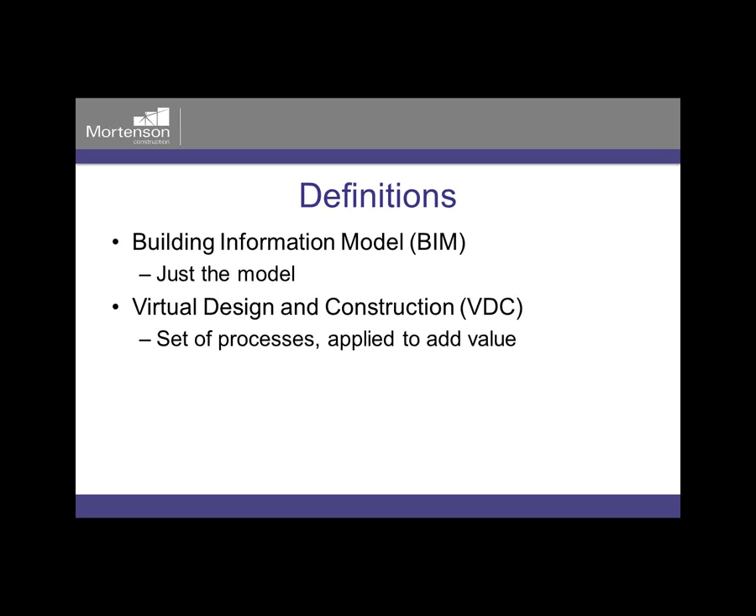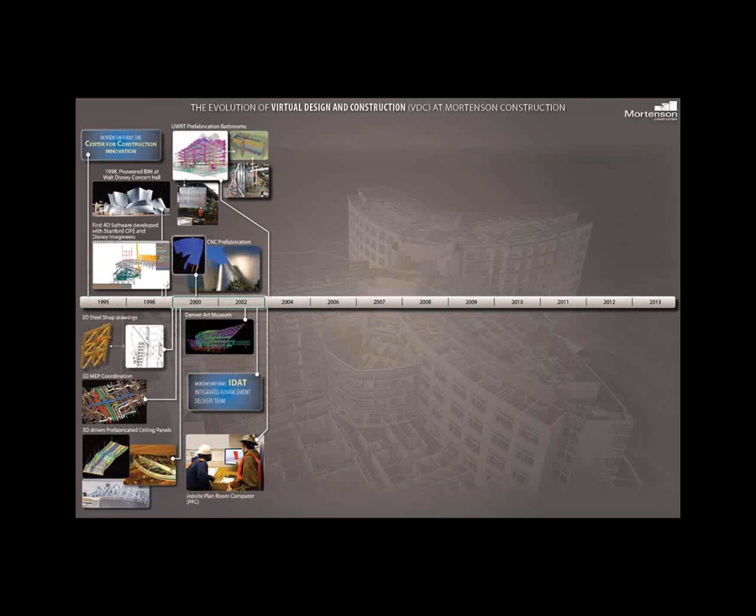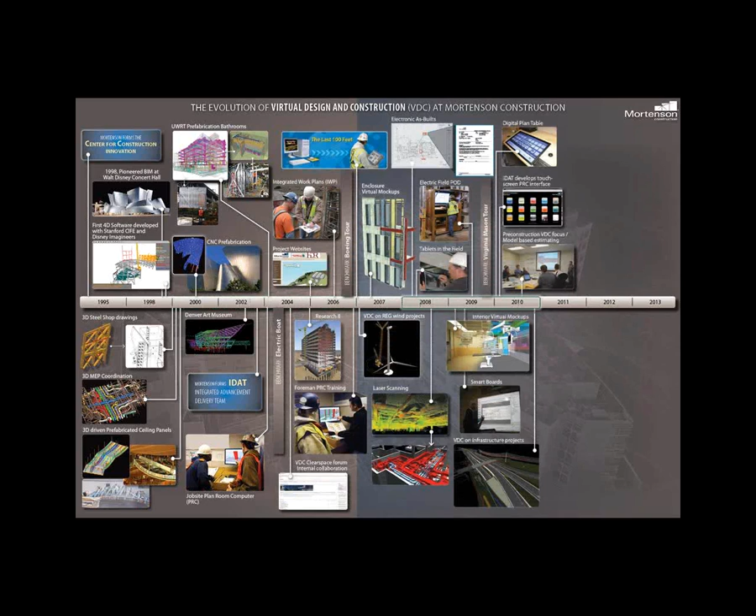Go ahead Chris. It's Chris here, just a brief intro. You'll see as the slide builds a timeline of Mortenson's processes related to virtual design and construction over the years. Our philosophy and approach is that the VDC processes utilize BIMs, building information models, but the value comes from the process, not necessarily the models themselves. The models are just a means to the end.

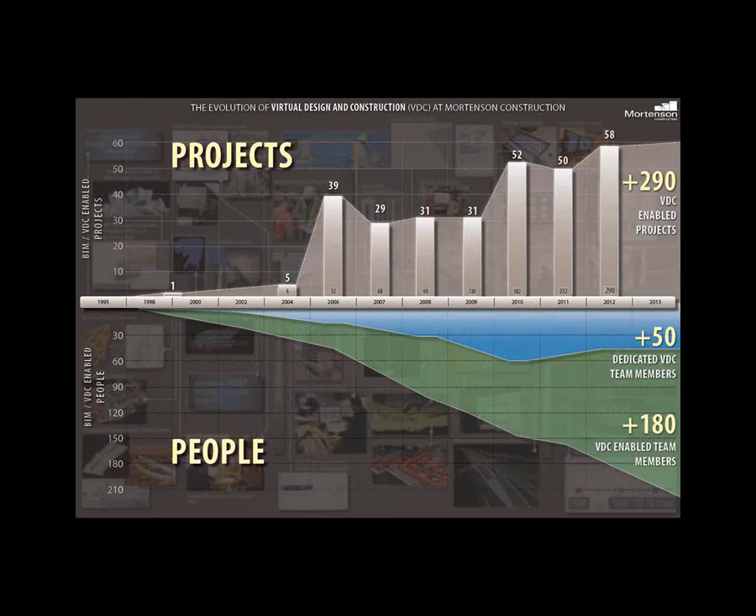Here's a little background on some experience over time where we're trying to grow both our project's utilization of virtual design and construction, and at the same time build the expertise and embed that expertise within our folks' skill sets.

Here's a little more history, if you will, or some reference or guideposts as far as Mortenson's progression through virtual design and construction.

The area we want to spend the most of our time on today is really acknowledging the difference between 'using BIM' on a project and differentiating those various uses that apply value through virtual design and construction. This reference graphic is from the buildingSMART Alliance, part of a project that Mortenson was a contributor on, among others—a consortium of folks representing architecture, engineering, contractor, and owner-operator areas of our industry.

And this is really the framework that we use to create a frame of reference for the various uses.

Let me interrupt you real quick. Typically you can see the plan, design, construction, operate silos, if you will, throughout the duration of an entire project. Historically, general contractors have been comfortable in our silo there in the third column. This is kind of where we operate and where we feel comfortable. We take elements from design, we build it, and we typically hand it over with the keys to the customer, and we move on. That was historically how we were doing it.

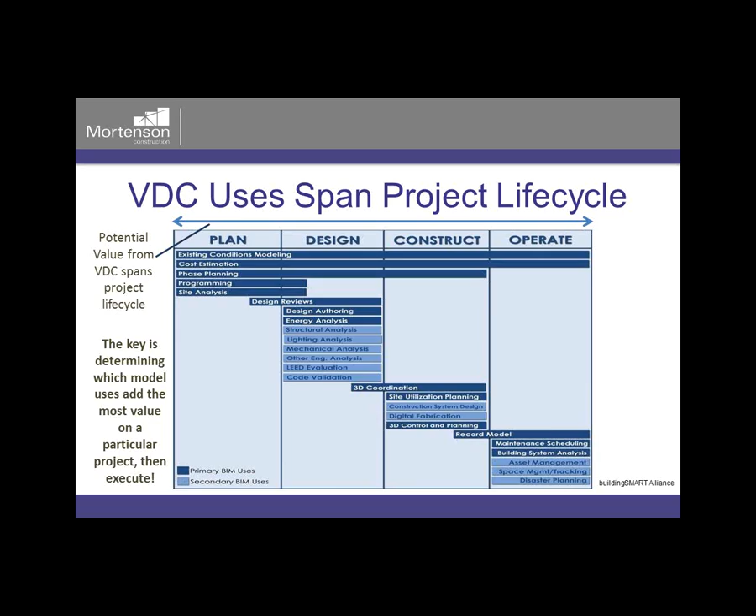The great thing about this framework is that it provides some consistent nomenclature, beyond just doing BIM. That was really a transition, a paradigm shift within the industry, as firms in the AEC industry and owners, the paying customers, get more versed in expectations that we're no longer just, quote, doing BIM.

An important piece of this is how all the parties contribute or inhibit VDC use to add value on the project. The largest way we believe to improve this is to acknowledge potential downstream uses for BIMs, for the building information models, early in the project.

So Mortenson's intent is to support the design and owner team to best deliver the value, not necessarily to be interpreted as us trying to define what the owner's needs ought to be. We're here to participate, contribute, and make sure those are enabled. Likewise with the design team, it's not our intent to say this is how the designer ought to be using it. The point is there's a dialogue and the framework across the whole life cycle.

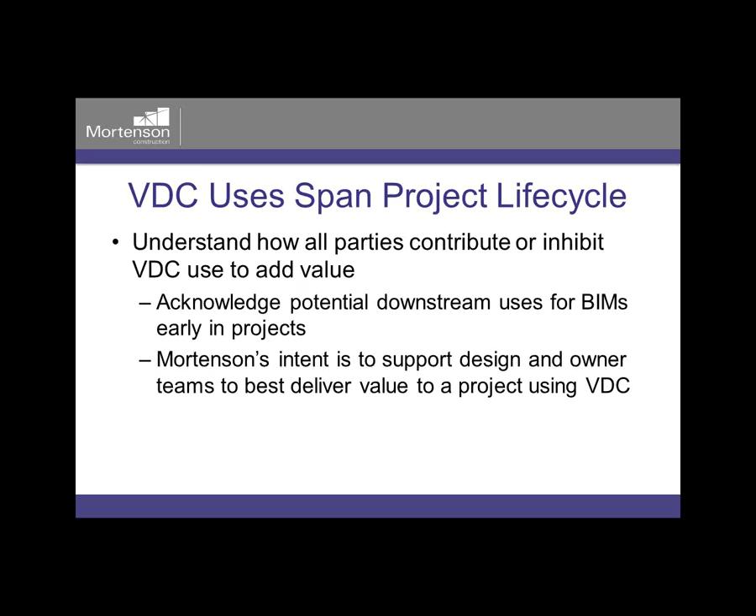Okay, so when you're talking about quality in construction, and specifically how Mortenson's organized, why VDC to quality?

So essentially what we're trying to do with quality is control our cost, mitigate our risk. It's all about customer satisfaction and repeat business. So let me go on with the next slide here.

There we go. So Mortenson's business model, we typically shy away from hard bid work these days. We are more of a negotiated contractor. Our business model is centered around not necessarily achieving work by giving the lowest bid. Ours is targeting specific customers, specific businesses, and specific partners to go on more of a negotiated front.

To achieve our desired outcome, our target value, most reasonable price, and repeat business, we have to really control how we're delivering our work, and that's where quality steps in. Because thinking in terms of the customer and the end in mind when we're planning a project, we're trying to give the customer the best product for the cheapest price and leave them with the best lasting impressions so we can turn around and have either referrals or repeat business.

Just a couple of stats here. When we do our customer surveys, when we are rated as a far superior contractor, when those particular customers go out and venture out to do additional work, we historically have a 60% chance of getting that work on a non-compete basis when our customer service numbers are high. So that's our strategy, and that's how we are approaching it.

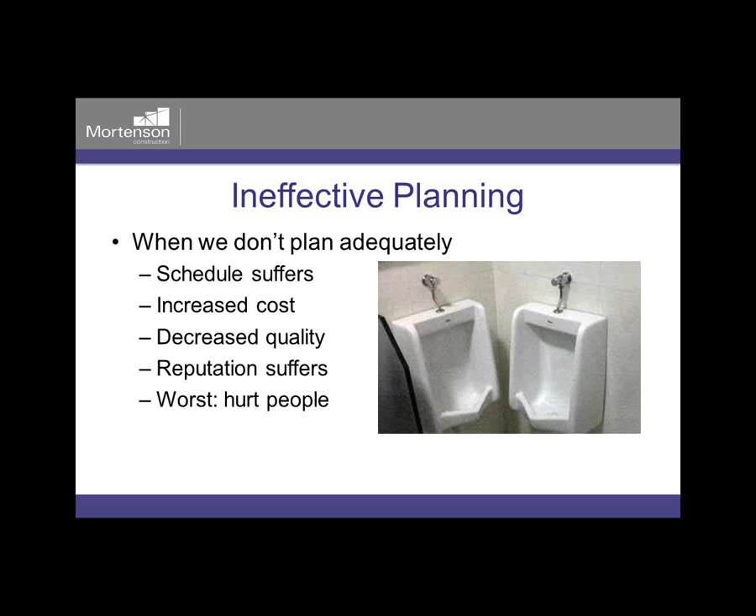Essentially, our strategy is developed around integrated planning, and integrated meaning it's not just us. We're involving all of our partners, from subcontractors and vendors to design partners, even customers. When we don't do that, the schedule can suffer. We can have increased costs, decreased quality, and damaged reputation. And the worst case scenario is when we do ineffective planning, somebody gets hurt in the process, which we absolutely do not want.

You can see elements of improved planning, increasing predictability. We want to know what's going to happen, when, internally and externally — communication to the outside world, to customers, especially when we're involving adjacent spaces or disruption avoidance with occupied spaces. We need to know what's going on there and manage those expectations. As you'll see in the following slides, some elements of how we can utilize VDC and leverage it to make that communication clear.

Again, beginning with the end in mind: establish a plan and control the perceptions. Value added — we're not going to do something just for the sake of doing it. We're going to think in terms of the customer, what their desires are at the end, and utilize that.

As part of the, how do we do that? This is one of the most important parts. It can be natural from our own perspectives. What we'll see frequently is so many things to pursue on a project, and so many things are important, and there's a natural tendency to just dive in and start creating content and moving — the feeling of let's just start putting work into place. Really the important strategy here is to make sure we're pairing up those opportunities, needs, and risks for a particular project, and align a use to make sure we realize the opportunities on the project's behalf, or mitigate risks and uncertainty. These model uses really achieve that — that's really the key objective.

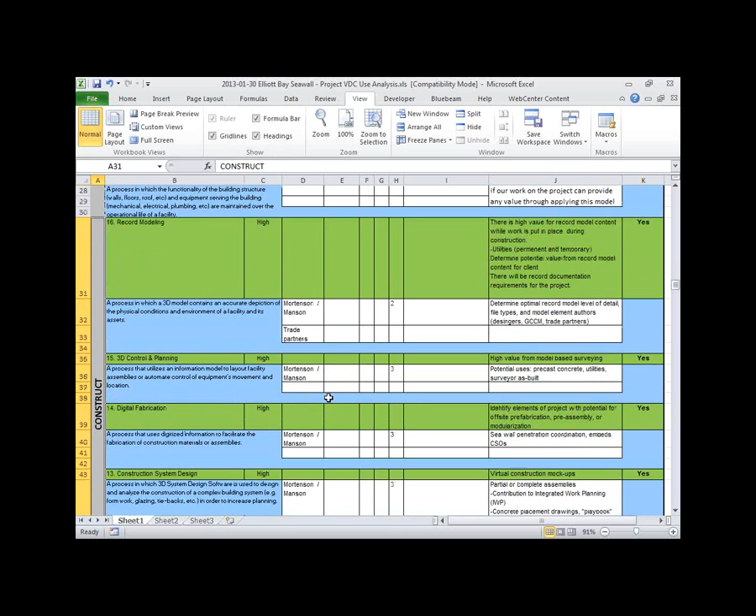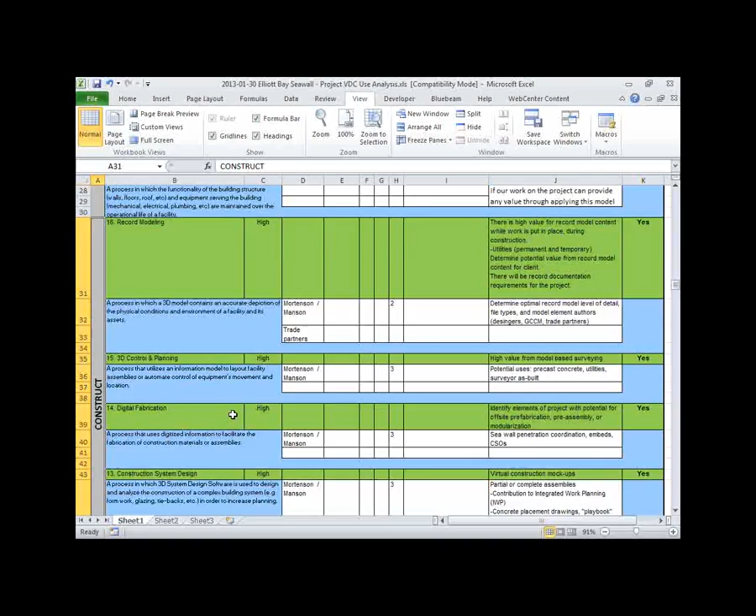Here's an example of one of the buildingSMART Alliance templates. If folks on the call aren't familiar with it, I definitely encourage it — this is open source information from that consortium we were talking about, which really gives the best shot at leveraging common nomenclature for various uses and aligning a particular project's needs with those uses. All the way from the operate stage, to construct, design, and plan — really beginning with the end in mind — what would the client, the most downstream customer, achieve value from?

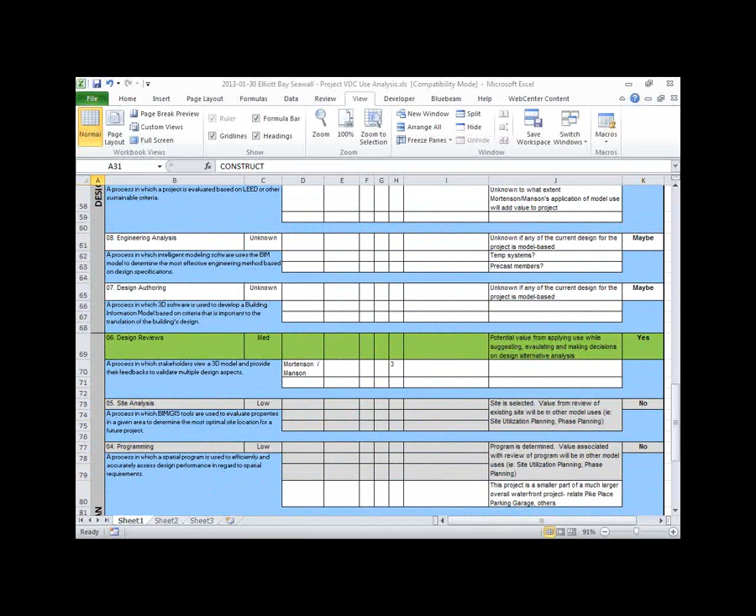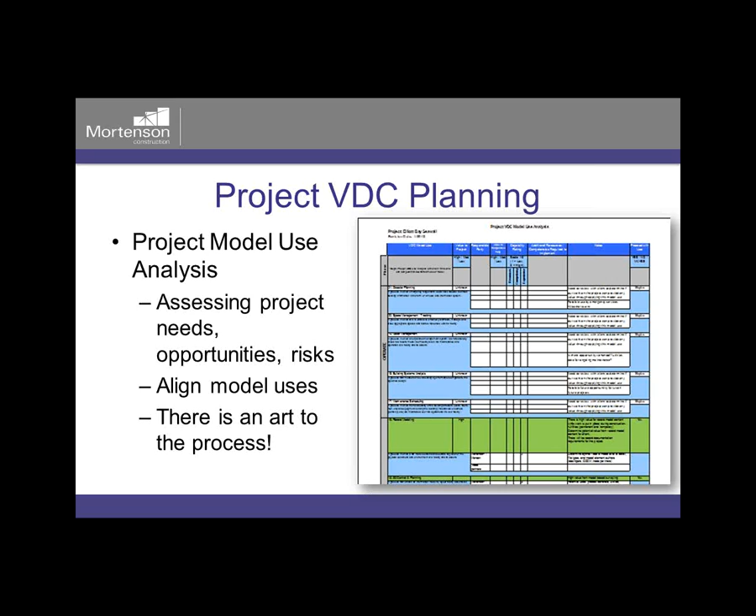This is a really great tool, not just for us, but also for specification writers when we're thinking about interfacing with customers and trying to interpret what they want in the end, and outlining that so we can set expectations early in the design phase and get those written into the specifications. The earlier the better, as we'll find out here in a minute.

The next step after establishing these potential uses is creating a plan that the team can utilize to agree on and go execute. So there's definitely an element of model management between the various firms — designers, trade partners, the GC, and CM.

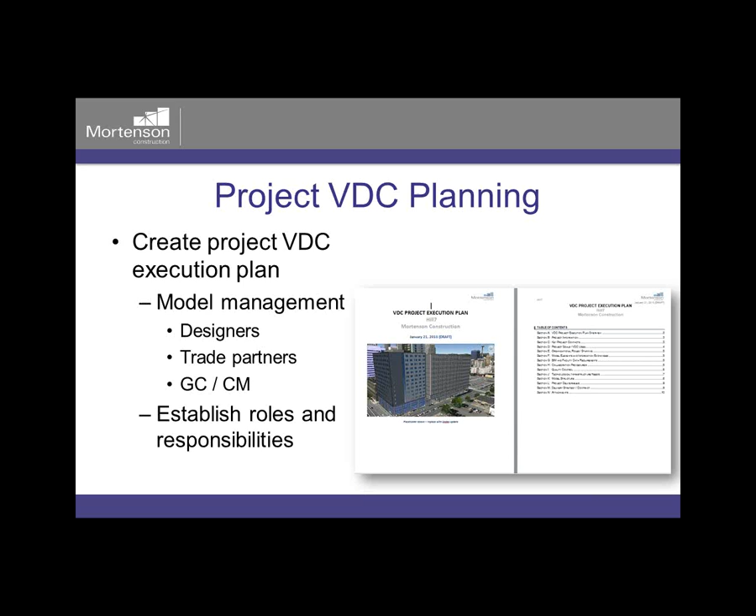The key thing happening here is we're establishing roles and responsibilities, schedules, milestones, and all the intricacies of model handoff and right of reliance. Those things ought to be determined and documented within a plan. It needs to be clear on who's going to make the model, how it's handed off, who's managing the subcontractors with their input, how we're doing clash detection, how that's delivered back to the architects, who's as-builting, and who's delivering the final deliverable to the customer. This document makes that crystal clear for all parties from day one, so we're not having these discussions as we go.

Okay, integrated planning. What you're looking at here is a phase plan — a structural phase plan for a project we did in Billings. This is typically how, if you've heard the term 'the last 100 feet,' we take information from the model and deliver it to the foreman and craft on site. We translate this down into a PDF, and it was actually an active PDF with a movie showing our construction sequence, which was critical because we had some very critical leave-out elements to get mechanical equipment into the building.

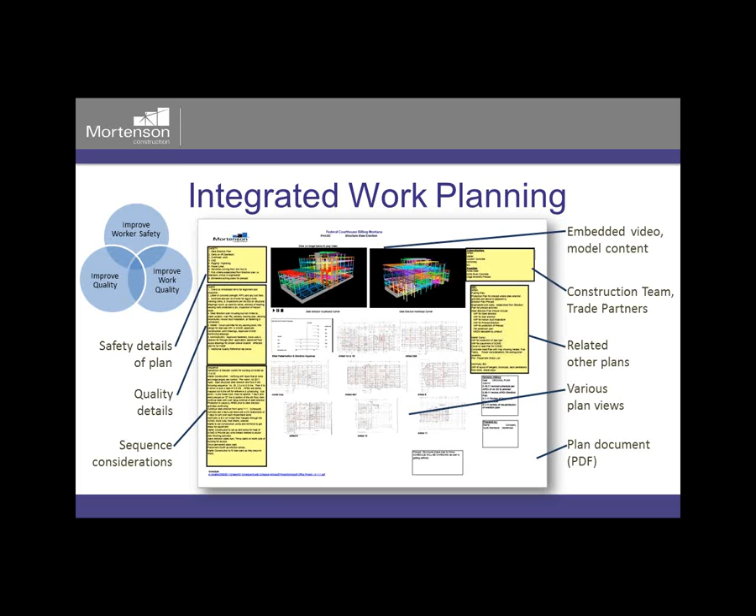We can also print this out in an 11 by 17 format that the foreman can keep in the gang box to understand what's going on and communicate that to the craft daily. We cover safety, quality, and sequence, and this information is extracted right out of the model. I think we used Synchro along with the structural model to show the sequence of how this is going up, and we embed this into a PDF so we can email it to everyone and they can play it at their leisure to see what was going on. Other elements typically included are the players, their phone numbers, and other related plans.

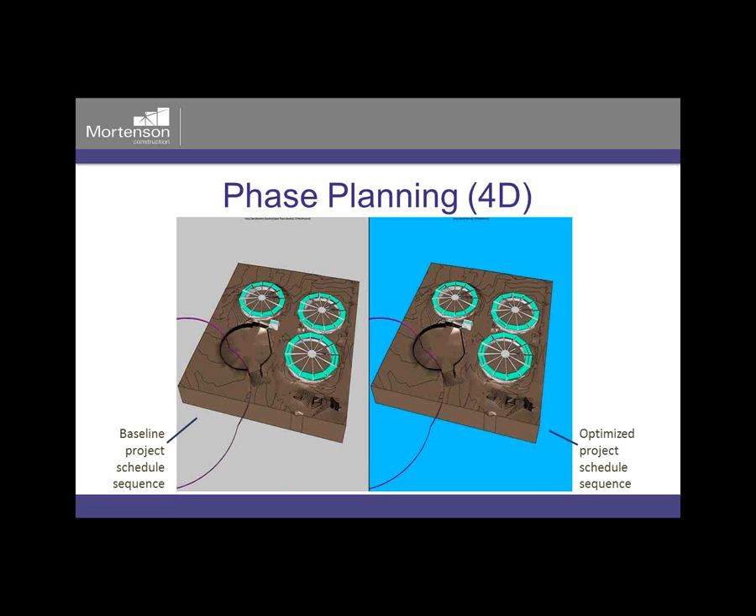We've also begun incorporating 4D planning, which was extremely critical on this particular project. You're looking at three existing clarifiers and a new clarifier for a wastewater treatment plant we're installing in Bellingham, Washington. The purple circle is a 100-foot radius from a heron's nest. In order for this project to permit, we could not perform any construction activities within that 100-foot radius between January and April, the heron mating season.

So we had to prove how we were going to get this done, maintain our schedule for the customer's needs, and permit it through the Department of Ecology to show we wouldn't disturb that radius. For those who know about clarifier mechanisms, typically you construct them from the center and work your way out. The model on the left shows how the clarifier was originally planned in the CPM schedule. The model on the right shows how we had to adjust it to build the elements within that radius first and work our way back. There was a lot of sequencing and replanning to ensure we stayed out of that 100-foot radius.

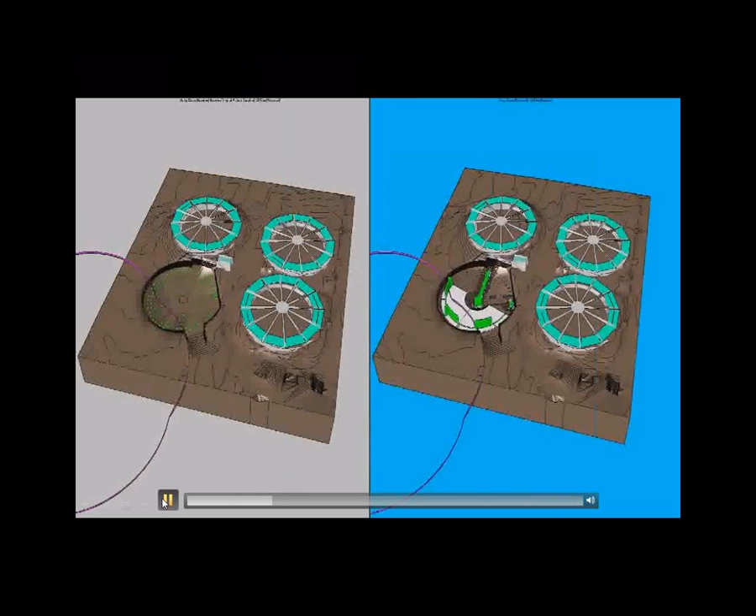So this was a communication tool. We used BIM to leverage this with our project teams, subcontractor partners, the owners, and the city to show them we'd get this done in the time frame allotted — that we wouldn't be within that 100-foot radius come January. Otherwise, we would have never gotten the permit.

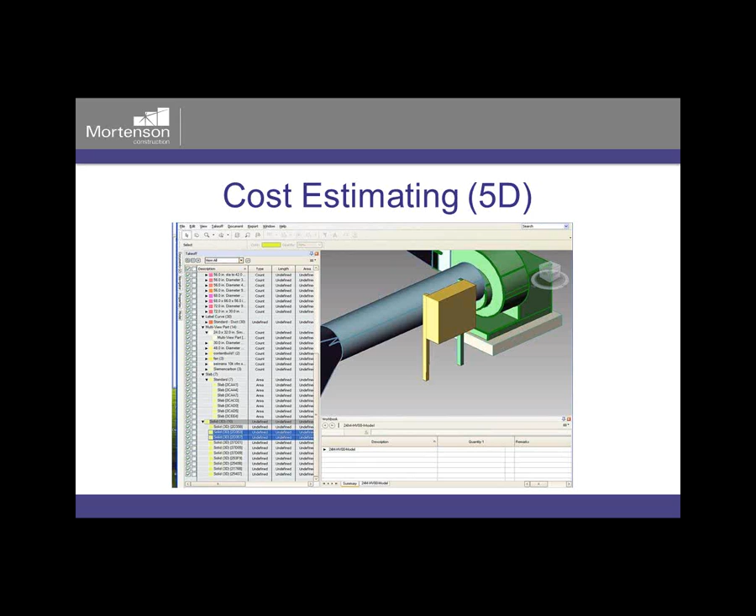Another use and application of the intelligence and information contained within a BIM is its basis for cost estimating, also known as 5D. The common nomenclature, of course, is 3D for the spatial attributes of a model element, the fourth dimension is adding the element of time and sequence, and the fifth is cost estimating. Here you see an example of model elements linked to cost assemblies, and model assemblies together with cost assemblies can really be used as the vehicle, the carrier for cost-related data.

Existing conditions modeling is one of the uses that was right at the very beginning of the time scale or life cycle here. You can see an example of an existing facility and build out, and the coordination that goes with the proposed design, also through laser scanning.

Let me make a couple points on this. This is extremely important because as the economy shifts, especially with our customers in the medical field, back in late 2007, 2008 the model was let's build very large facilities and bring people in. But now as the economy shifts, we're going into a lot of existing facilities and reconfiguring them. This seems to be the typical business model now for the medical industry. So the ability to go into an existing facility that might be functioning above or below you, identify the existing utilities, and design around that is incredibly critical to the schedule of the project. Otherwise, we have to identify where things are so we can design around them to maintain that schedule. This technology is invaluable for that.

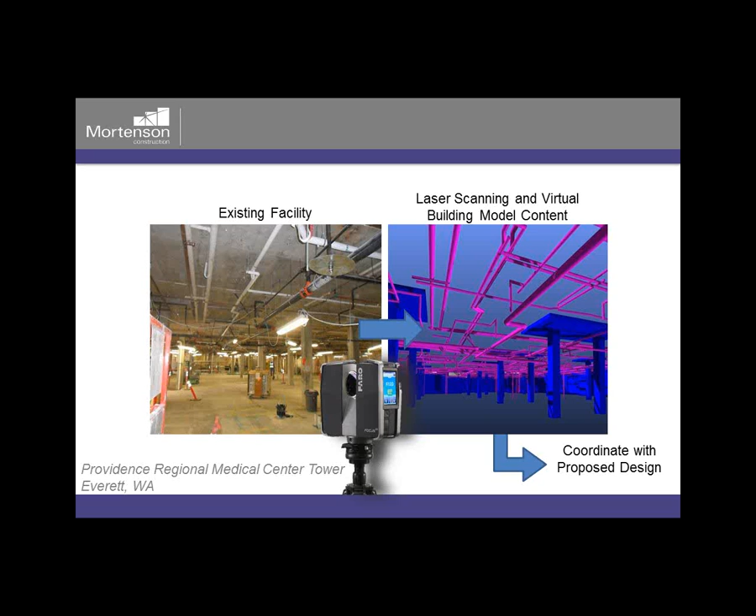Here's an example of the graphic output that would come from existing conditions modeling, capturing the existing conditions within a space—this is a renovation example. The color gradation you're seeing in the graphic is demonstrating the variation in the elevation of the floor slab, and you can see the floor plan superimposed on top of the color grades there.

The main takeaway here is that the bright green hues in this display were the design zero for that particular floor. What you see represented here is a variation of over 2.5, close to 3 inches total variation within this floor, which by the naked eye you wouldn't necessarily see. But by capturing those conditions, you can really address and determine where you need to address common construction tolerance in an existing facility.

In this particular area here, you can see telegraphing through the existing floor slab, the structure, so you can see where deflection has come into play—blue would be lower, red higher than the design floor elevation. In thinking in terms of managing expectations, our surveyor went in and took about 600 shots to develop this. As far as managing expectations and driving efficiency and quality, we saw right off the bat that we were plus or minus 2 inches in a span of 10 feet in some directions.

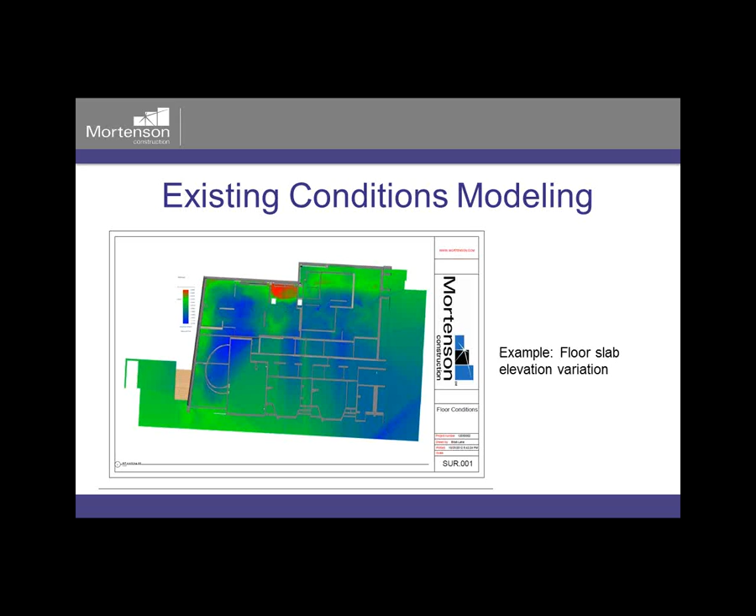You'll see how this spins off some other planning benefits as we go. Essentially we have a fully coordinated lift drawing for the foreman to utilize out in the field. We just extract that information right out of the model, put it into a format they can readily understand, and we can easily do QC off of it and build from there.

Here's an example set of metrics. Over 800 embeds on this project - a courthouse and buildings - and inspections and corrections via the model, using the virtual building model, enabled us to achieve 99.9% accuracy. Out of 811 embeds on this project, we got 810 of them correct, and we just missed one because it was misplaced twice, and we didn't do our follow-up inspection twice like we should have. It was in the wrong spot.

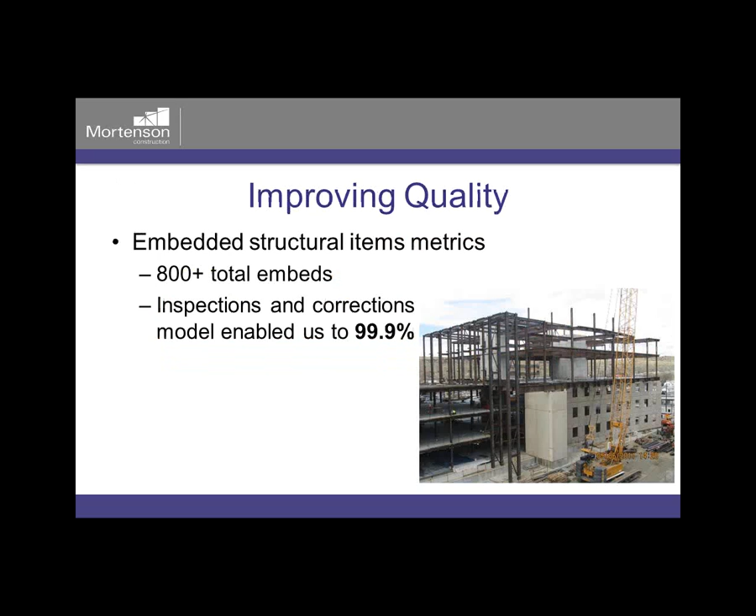Hey guys. Yeah, go ahead. I have one comment from Michael White just saying that it was really great to see the floor slab elevation image that you had put up there. But additionally, Brian Lightheart has a question.

Was the CIP drawing example developed for a base model provided by designers, or a model built wholly by Mortenson?

It was based on design model content, but given the level of detail that we need to show in the model - because our drawings for placement are at a higher level of detail than the design model in this particular example - that transition can be coordinated, and we've seen that happen at various points.

But in this particular example, I can give you a topic that's pretty frequent there. Maybe the design model shows a slab that's flat - the model content is completely level or flat. And in reality, in the contract documents, it could be noted to have a 2% slope, with an arrow showing directionally where the slope goes to a floor drain or what have you. Those elements are commonly not modeled with that slope in the design model at a level of detail, say 300, if you follow the AIA level of development scale model progression specifications.

So the team has to, as a part of the execution planning process - the first step was we determined that there was a use and a value for coordinating concrete placement. So this lift drawing, electronic lift drawing coordination process was enacted. We proceeded there. The next thing was, great, where is the model content coming from, and to what extent can we rely on design model content? And then, if we can or cannot, do we enhance or completely need to recreate content to rely on it? There is a mix - there isn't a single answer that serves every project.

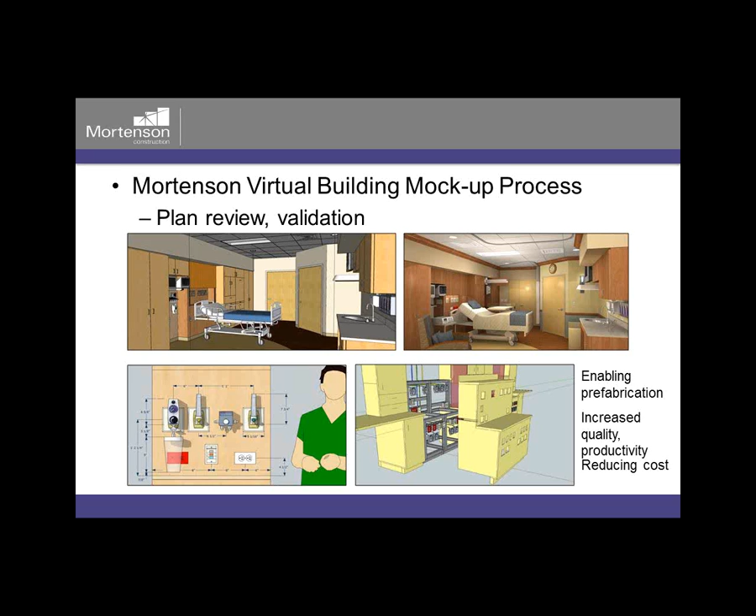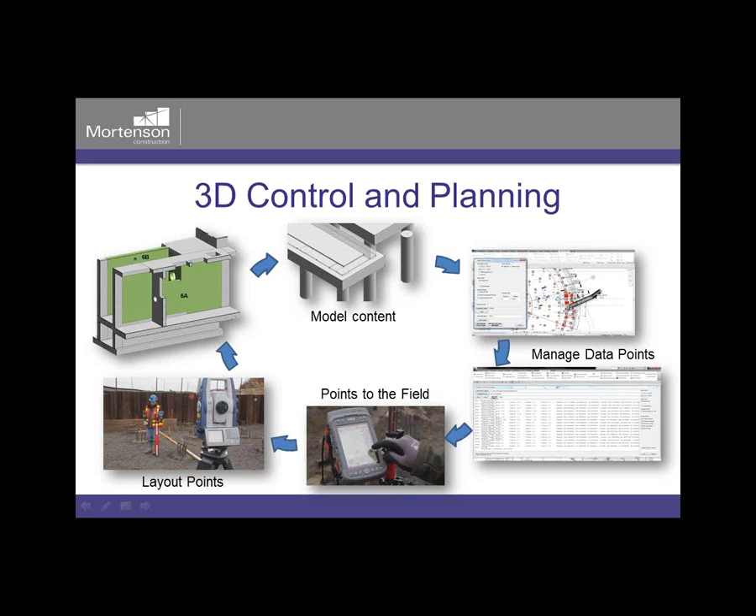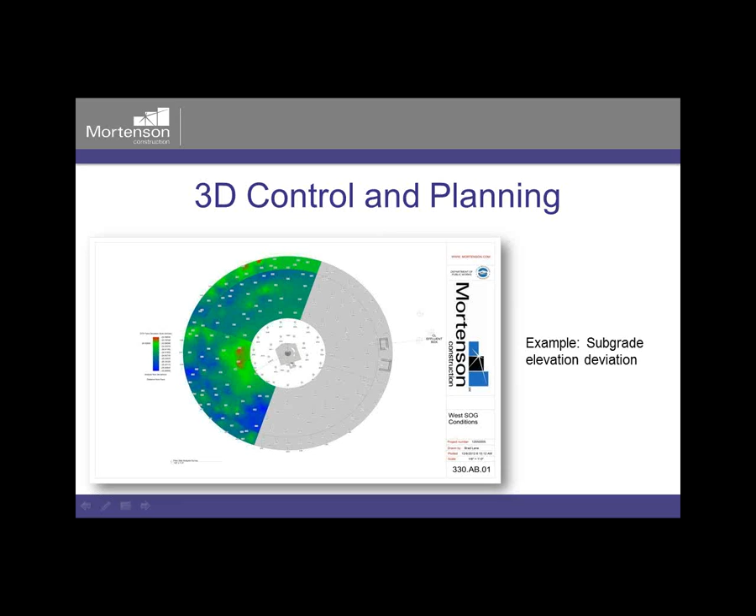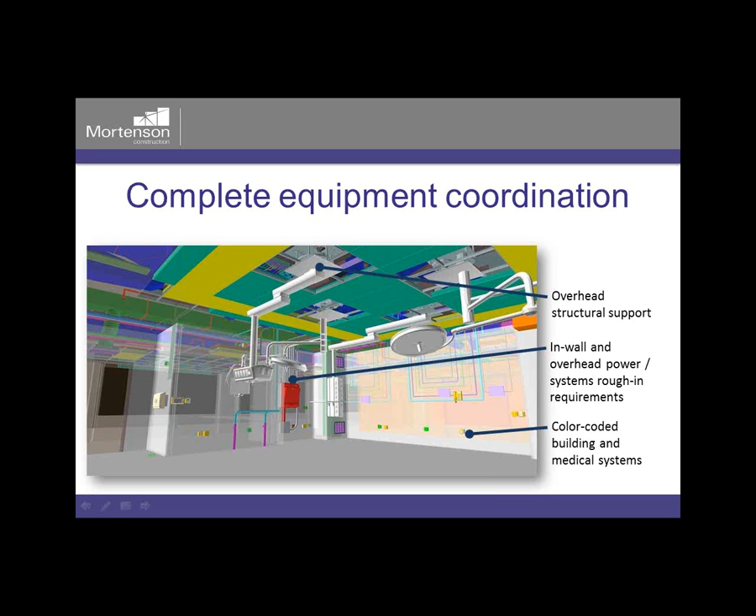Clash detection has pretty much paid for itself right off the get-go. This is a pretty standard staple on our projects, even the smaller ones that are under $5 million. We're still utilizing this technology because it can be done quickly and effectively, and with just 2 or 3 conflicts caught out in the field, this can pay for itself.

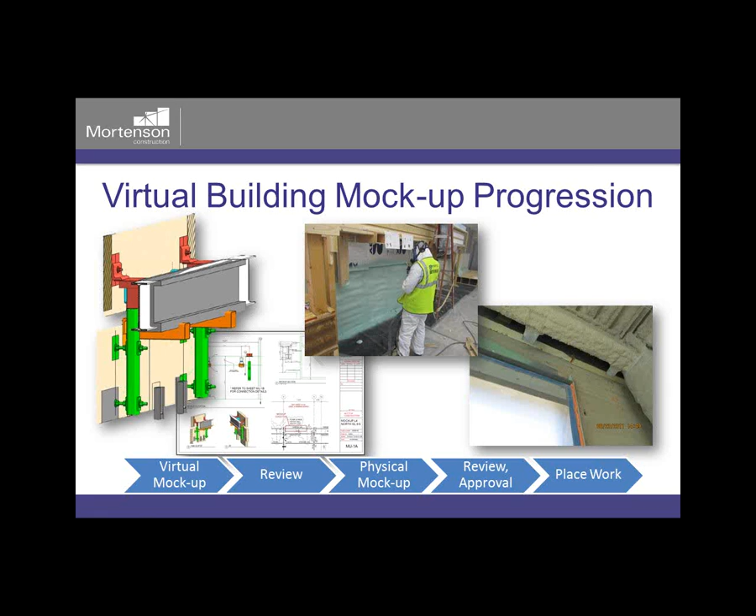So we actually went in ahead of time. We were able to figure that out utilizing this technology, where we would have these tolerance conflicts, and change the insulation detail in those specific areas. Because again, being this in Billings, if we don't have the right R value, we have cold spots - it's very evident in the product for the end user because it gets pretty cold there.

Summary, as we kind of button up the 3D shop drawing review process - this is essential for review both up front with the end user, who often may not be able to interpret 2D plans, elevations, sections, and so on. This, in combination with virtual walkthroughs, and then finally perhaps a build out of a mock-up unit - just another example of that.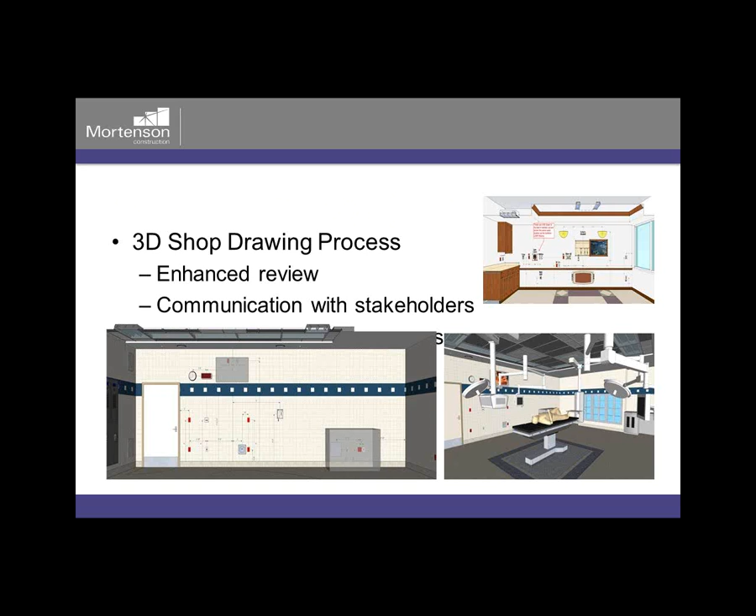Probably the biggest takeaway here, though, is that dialogue is essential to really establish with the owner what value is expected from utilizing model-based information. Because in many cases they aren't set up to access the model - whether it be a technology barrier, training, or the right personnel, or maybe existing facilities that aren't leveraging it already. It's a consistency issue in some cases, where other buildings or parts of a complex or institution are paper-based or 2D document electronic-based. So finding that intersection to be able to hand off and manage the data - that's definitely a dialogue that has to happen between owner, design team, and contractor to get it right.

So what we've discovered with this process is now it's becoming possible. What we're running into, and I'm sure many of you are aware of - facilities owners actually seeing the value in a model, what I call a smart model, that's loaded with all the equipment, all the operation, preventative maintenance, tasking, location - everything for every component that's out there.

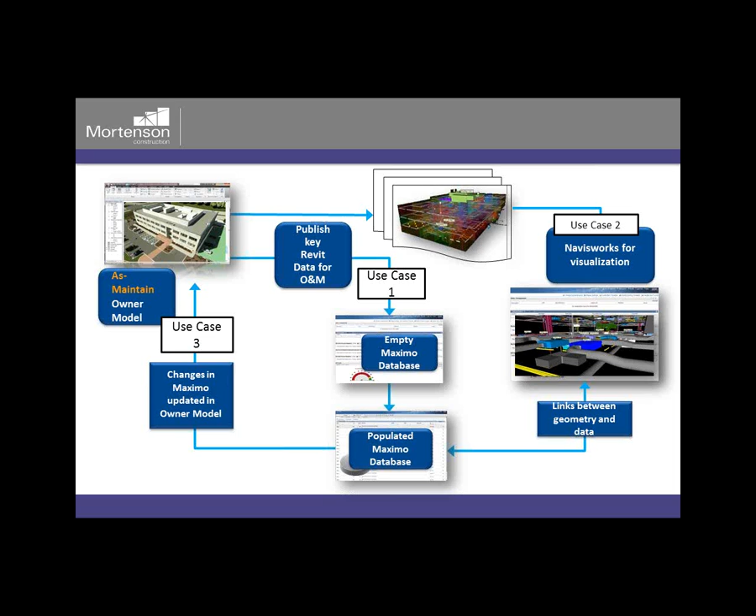We didn't want to omit one of the basic examples of communication and the outcome from a model, really illustrating the plan for work and how it might affect other folks, whether in an existing facility or new construction environment—communication is vital there. There's some great examples from the Seattle Seawall project that we're conveying to stakeholders, business owners, and so on, showing the plan for the work and what it entails.

All of the businesses along the Seattle Seawall are going to remain open during the new construction. They are scared to death about disruption and not being able to access their facilities during the construction period. So we're utilizing a lot of these models. First, we used this to get the project, because we were able to show what our plan was. Second, we're able to show it to these businesses so they have a much better understanding of what's going on around them and under them, giving them confidence that we will maintain pedestrian access throughout the project. It was critical to get the project with the city, and then to keep public interest at the comfort level it should be.

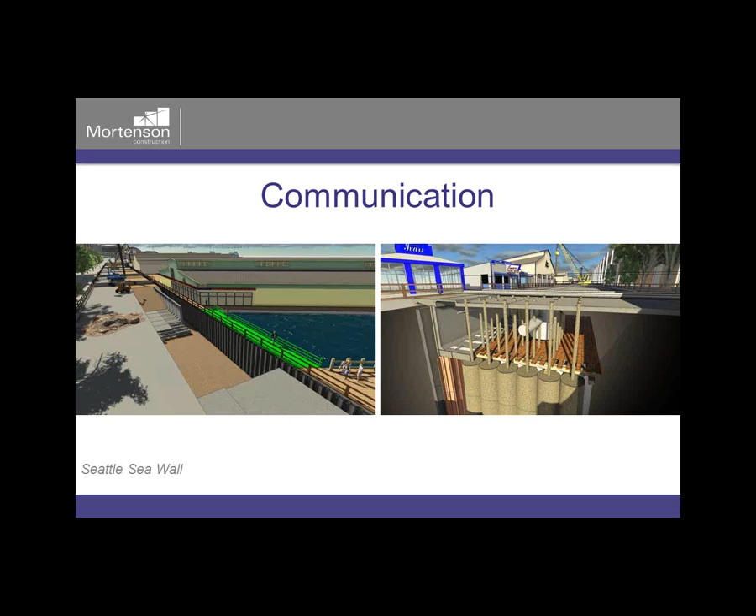The same communication applies also with our field folks. Mark mentioned the last 100 feet—it's really an objective of Mortenson to make sure we've got the right level of detail in the model, and that it's accessible in the right way so our folks in the field can apply it to deliver the value, so we don't fall short on transferring that knowledge to the field. The worst thing that can happen is you create a great plan and fall short because you can't communicate with the folks who need the information.

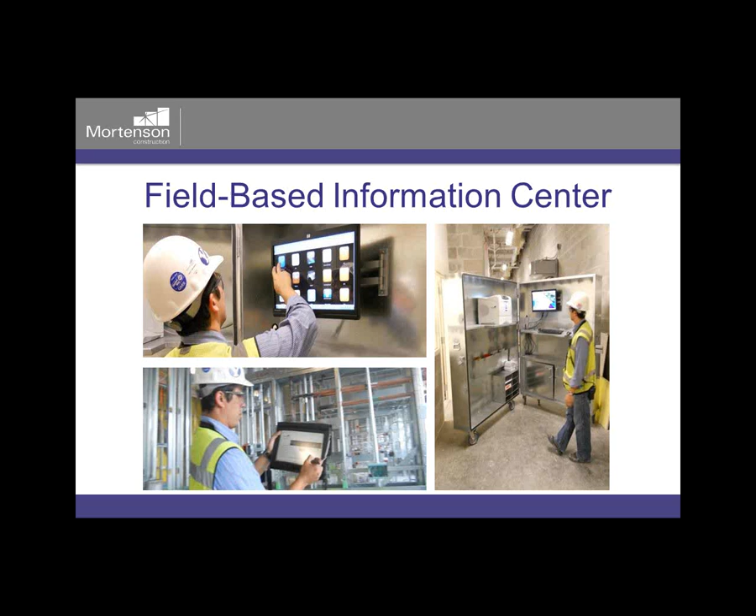Again, thinking with the end in mind: what was most important to Tim Heidebaugh at Central Washington Hospital in Wenatchee was understanding what's going on inside his walls. Those of you who've built a hospital know that before drywall goes on, it's very difficult to see from one room to the next because of all the med gas lines and water lines running through there. Having photo documentation linked right into the model that he and his crews can find easily was the most important thing to him.

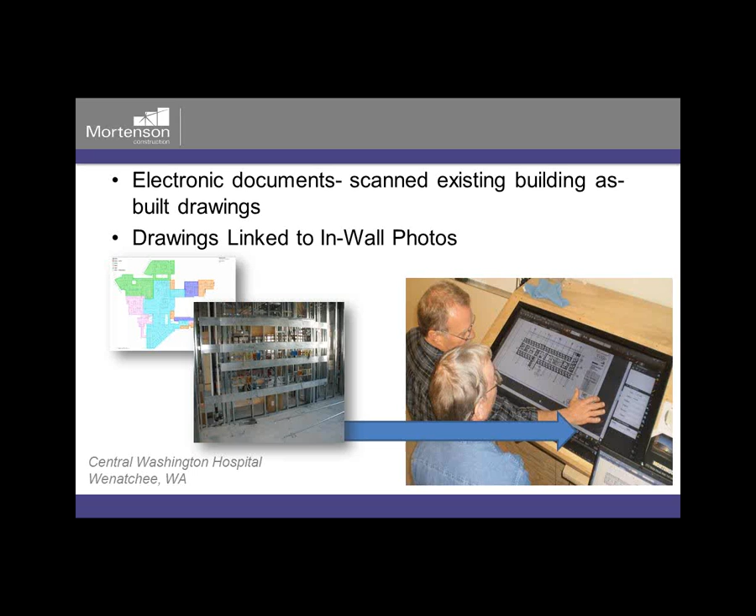First-time quality, again, why it's so important. We're utilizing all of these tools to get it right the first time in terms of impact to the project, why that's so fundamental. Getting it right delivers target value for the best price. If we're hitting first-time quality, we're able to deliver the best product to the customer for the most reasonable price.

If our quality issues increase, we have event management in there - that's our inspection process, essentially tracking our deficiency list. That's a trailing indicator that the cost and time associated with making corrections goes up.

During punch list, the goal is of course to eliminate it, but the more issues that pop up at that third level, away from first-time quality, the impacts increase - cost increases, time increases. With punch list you're talking about the design team and owner stakeholders, and you're wasting their time if you're generating tens of thousands of items when they should be zero. Then when you get into the warranty phase, the end user is utilizing the facility.

The impacts are most severe if we don't get it right the first time. If something comes back to haunt us - a leak, a failure, or not meeting performance requirements we should have caught through the inspection process - these tools help enhance that detection.

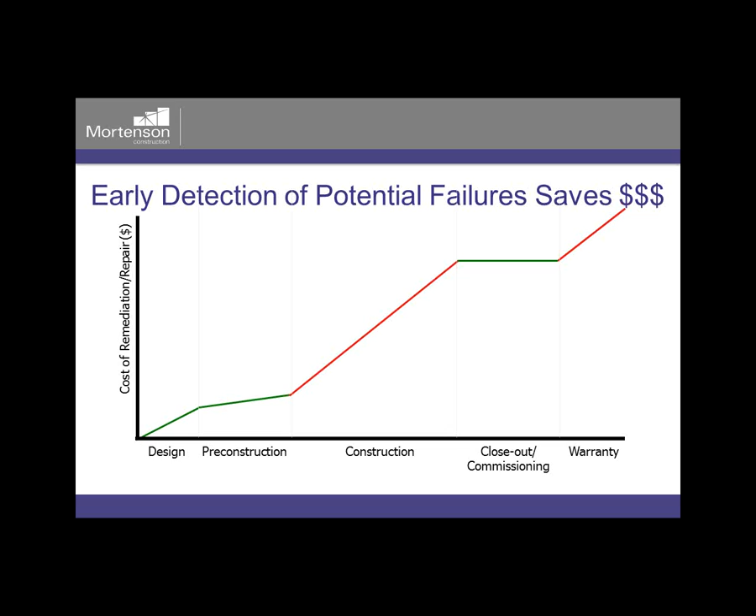You can see this on a scale of cost and time. If we find these issues in the design phase, during coordination, the cost and time associated with detection is minimized. As you get into construction, closeout, and the warranty phases, the cost and time associated with making revisions increases exponentially. So it's extremely important to capture issues utilizing these tools as early as possible in the process.

Again, thinking with the end in mind - thinking of the next project, thinking of that happy customer - consistent with our business model. We're not out there in the hard bid world; we're out there to develop relationships with customers and repeat business with not only our customers, but our trade partners and design partners as well.

So again, planning begins with the end in mind. If we have the right tools and execute properly, we make for a much smoother project, and that sets us up for the next one. It's all about getting the next job.

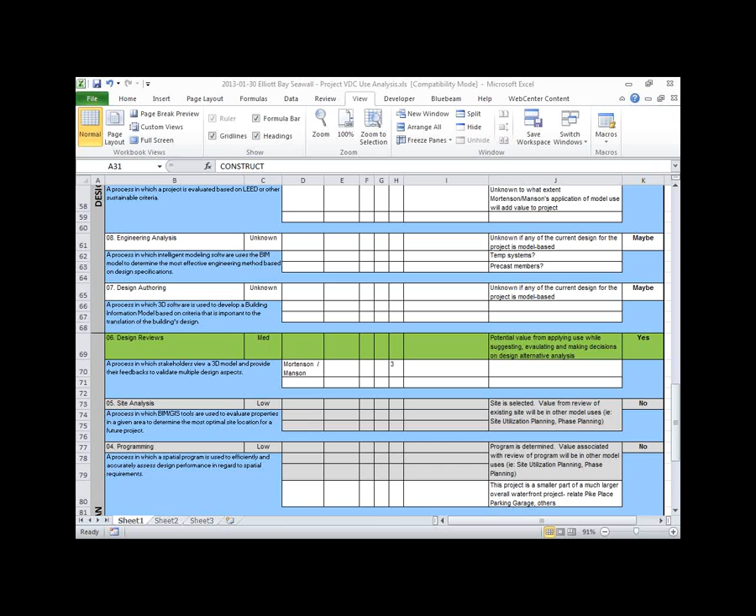All right, and we have another question here from David. Are you using coordinated documents, such as your steel embeds, in the field? The question is, do you submit to the design team traditional shop drawings of a limited scope, or do you combine into a composite installation document?

I think it's a little of all of those. It definitely is the last one, where it's a comprehensive construction-generated document, but we look at it like a 3D shop drawing. It follows a very similar review, except it's enhanced with 3D capabilities, like the parametric modeling we mentioned, carrying a pipe sleeve with the pipe along with its layout information.

I think it also depends on the sophistication of the vendor we're working with. From our steel suppliers, if they have the sophistication to actually utilize this technology and put it in the 3D shop drawing format, and if the engineer is happy with that, then we'll go that route. Otherwise, it'll be traditional 2D drawings, get it approved, and then build it into the model, which is what we do about 50 to 60% of the time right now.

I remember a good example of this, where the shop drawing review process was for fire sprinkler review, and the engineer of record wanted to review coordination and sizing. They were attending remote big room meetings, where you get the various stakeholders involved, either co-located or leveraging a GoToMeeting environment if they're in another state or country. Even though the requirements were such that we would submit 2D documents, we complied, but everything we did to create those documents was 3D based, even the review.